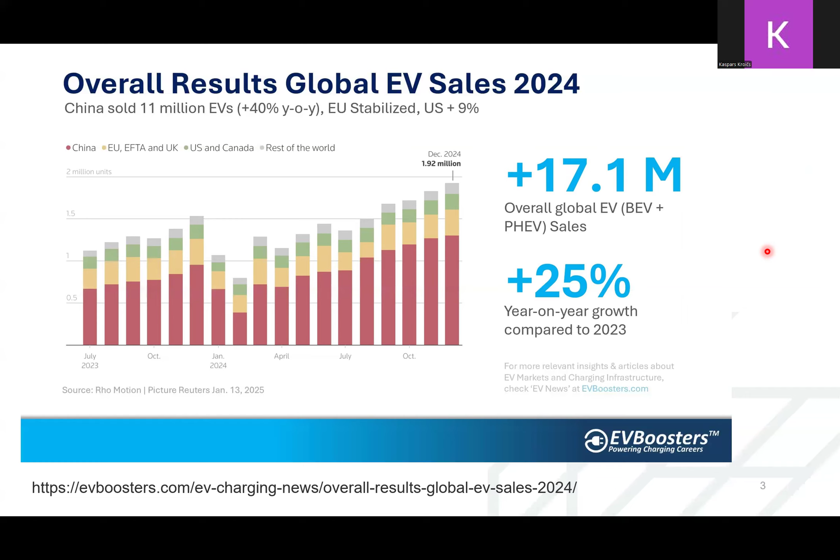And the same is basically possible also for aircraft, to replace conventional engines with electrical ones. So let's see how it is in the case of aircraft.

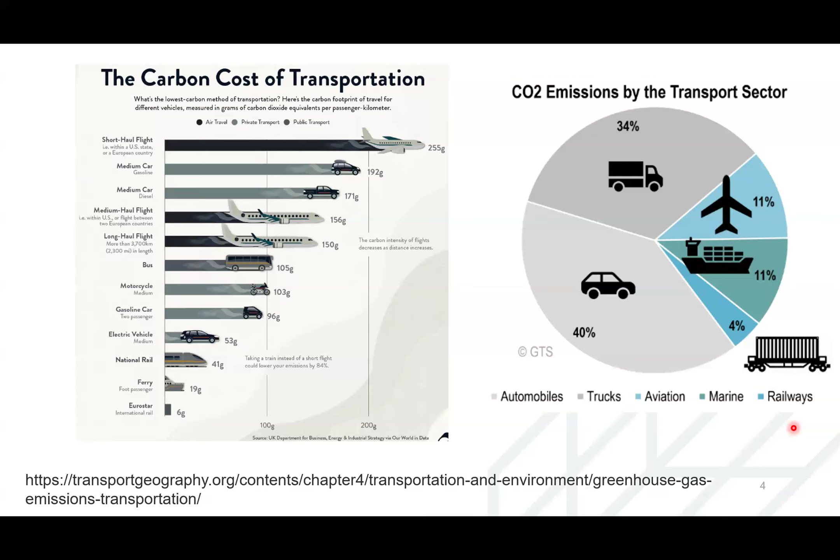Of course, many people own cars, so that is the main contributor. But people want to travel all over the world, and we can see that planes also contribute significant emissions. This is the reason why several organizations are setting targets for the future.

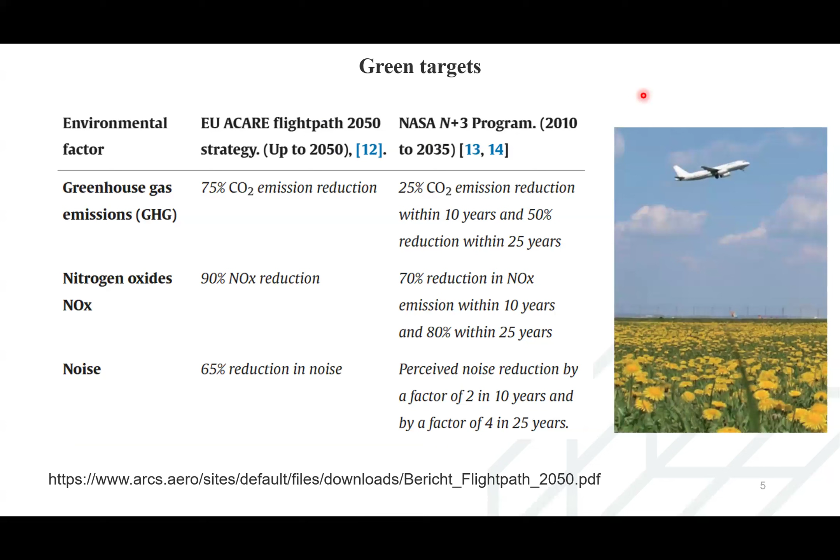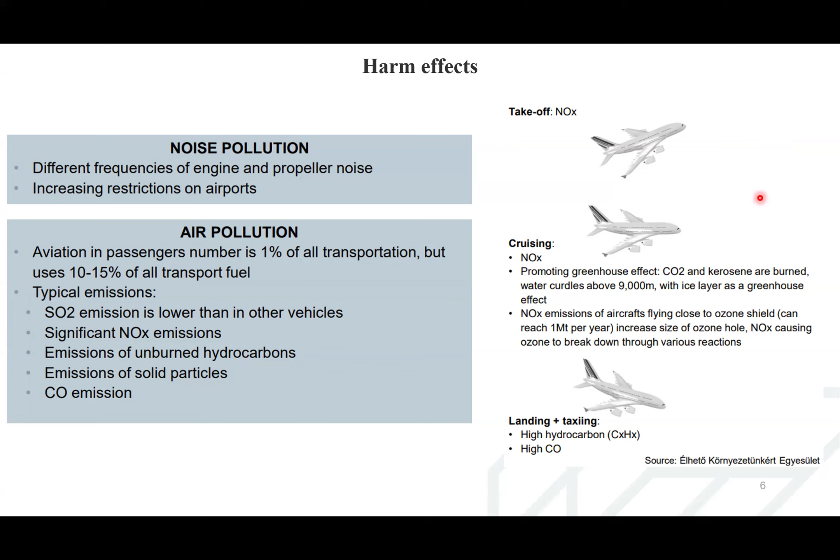How can we reduce this pollution? There could be different approaches. The first one is turbo electric. Basically, we generate electricity and then consume this electricity to power the ventilators, which put the airplane into movement.

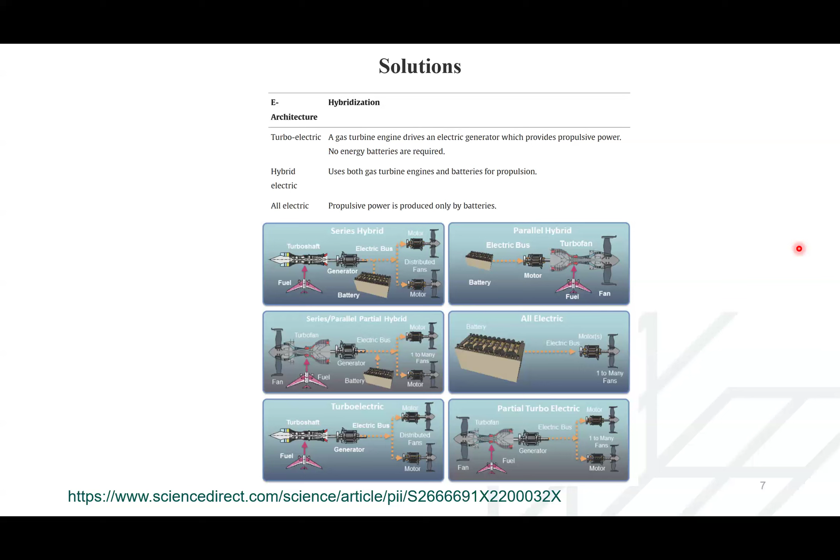Then the next stage is hybrid electric, when we also have batteries that contribute to the drive. This means that when there is need for higher power, the energy from the battery is used, and the gas turbine can operate more or less constantly, thus increasing efficiency. Also, an all-electric aircraft is a possibility that should be considered.

So in the turbo electric case, it seems that it is not very smart - basically we produce electricity and then again put these propellers into action. Actually, we are losing around 10% if we just use the same shape of the plane and the same ventilators.

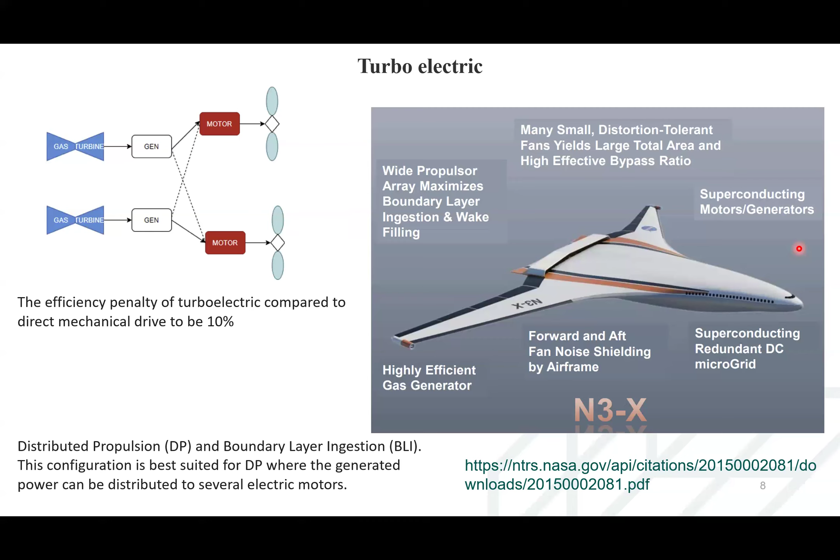So to increase the efficiency, we need to use more advanced propellers. For example, here it's possible to see that this plane has many propellers, and this is the way to increase the efficiency.

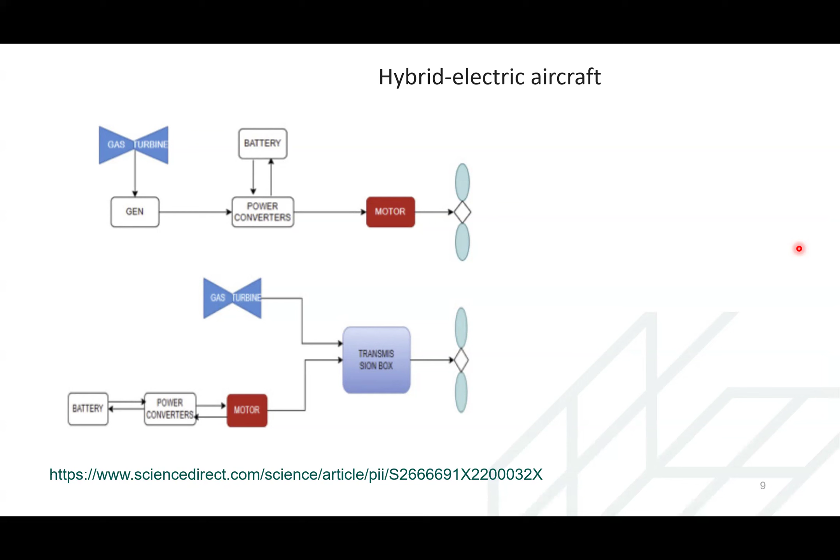The next stage is when we add a battery, which can be charged on the ground, or partly charged from the gas turbine. In this case, we are able to increase power, which is especially useful during takeoff, and of course, in that way we reduce the pollution.

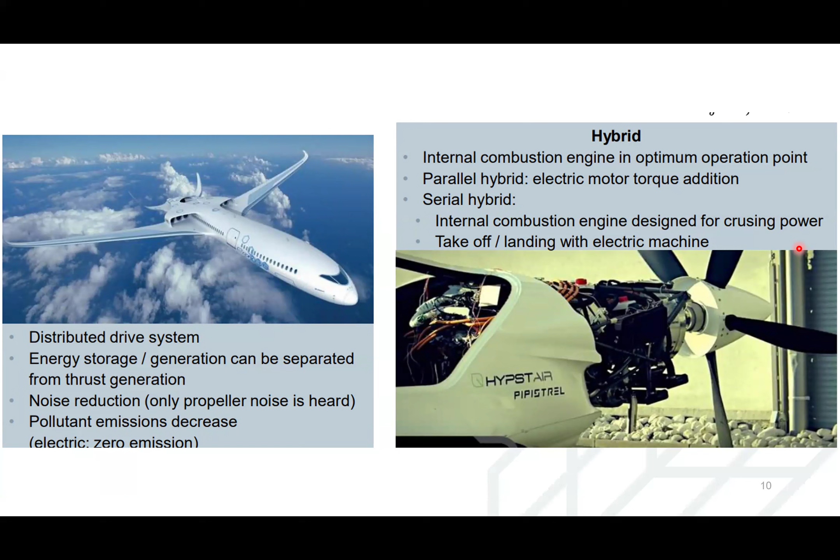Here also, we can use these multi-propeller systems, which again is very useful. For example, it's possible to see such an airplane, which has two generators with gas turbines and 16 motor fans that use power not only from these generators but also from the battery. And there are also some smaller planes.

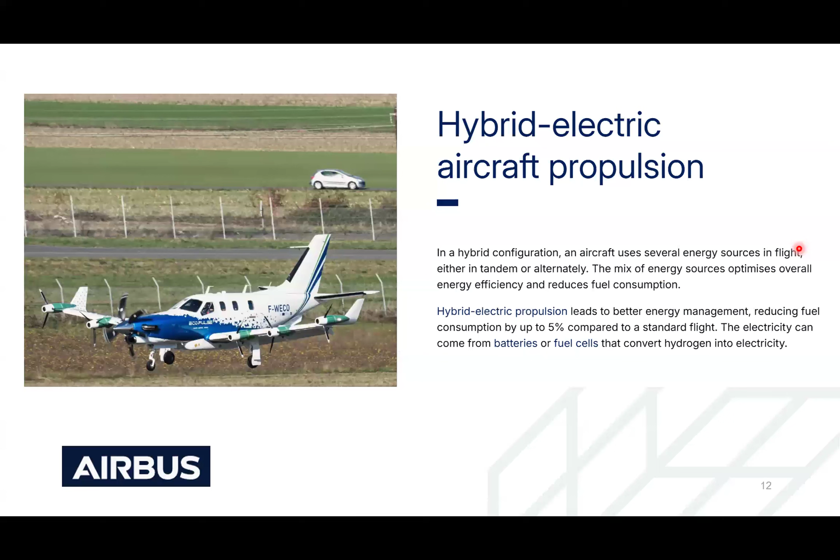Currently, this is in the research stage where these planes are tested and improved. The last option is the all-electric plane, when there is no gas turbine and all electricity is generated from the battery that is charged when the plane is on the ground.

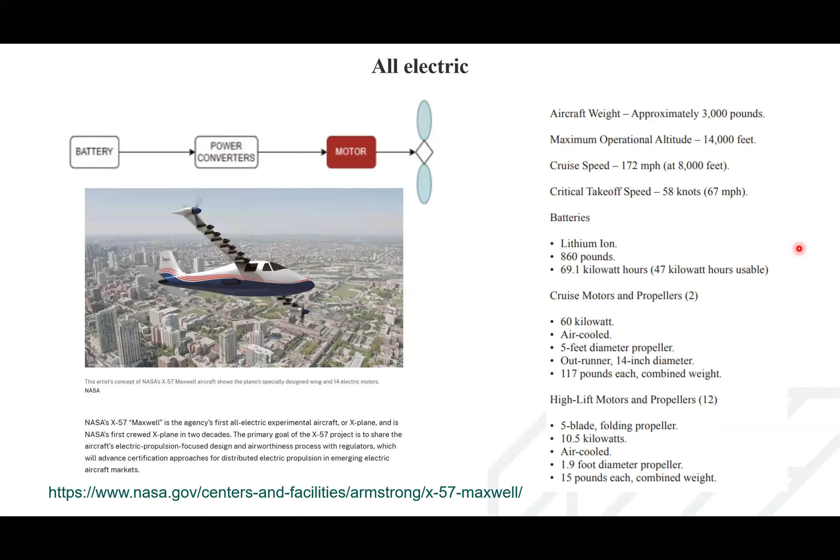There are quite a lot of small airplanes that already provide flights with such a system. As we can see here, this plane is quite similar to a car, so the battery has a similar capacity, and of course we have electrical motors. Here is another example.

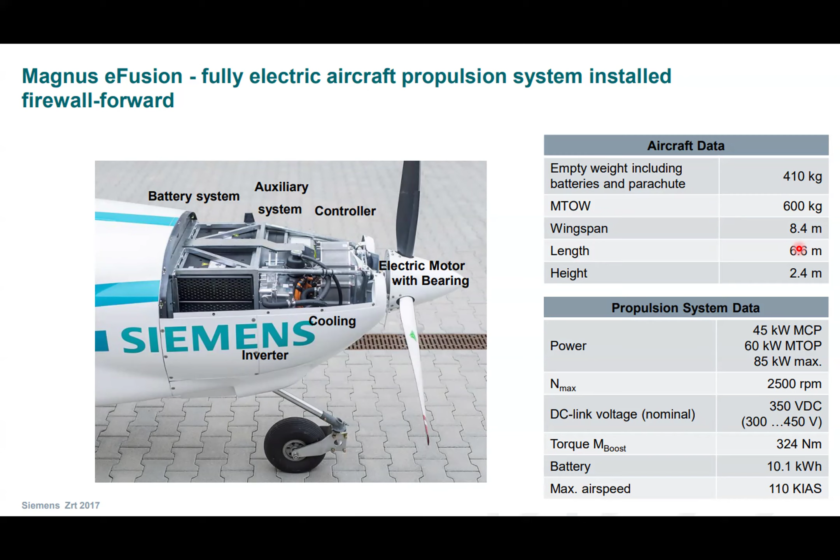Of course, these electrical components should be as small as possible, and also the battery should be as light as possible, because it impacts the system more than for a car - the whole system needs to be very light. The benefit is that it's quite easy to design an airplane that can take off vertically and then fly as a conventional plane.

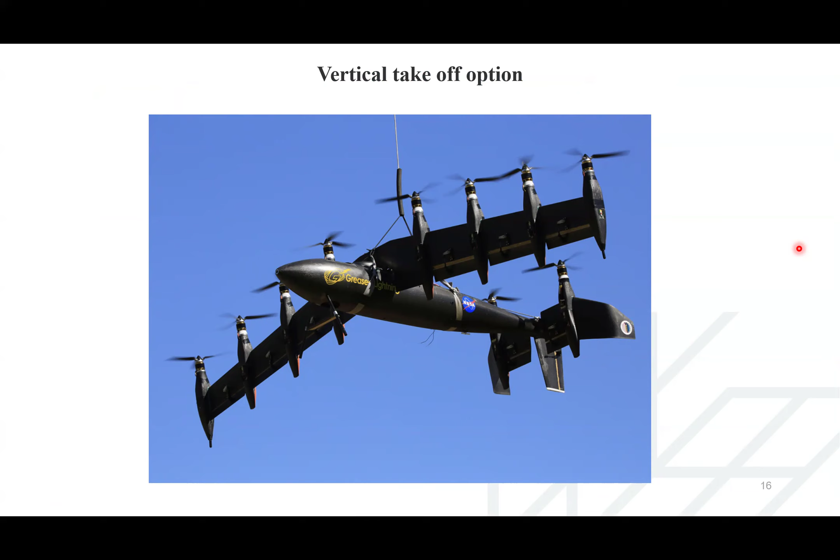This is very useful, but unfortunately, as we can see here, the lithium ion batteries compared to petrol or diesel still have power and energy density that is about 10 times worse. So this is the limiting factor.

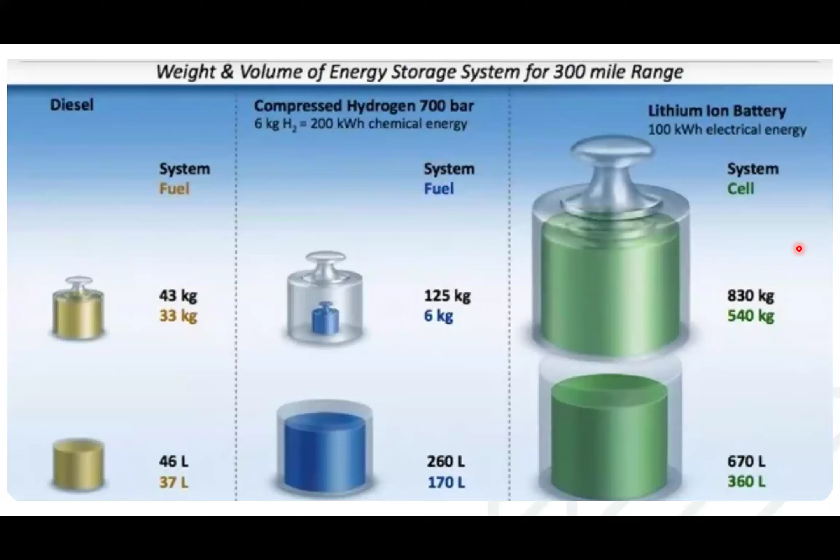The better solution could be hydrogen because it has a higher energy density and makes the whole system lighter. With the current battery technology, it's not possible to build an airplane that can carry many people over long distances. Probably after some time there will be more advanced battery technologies, and then we can build big planes that can go for 1,000 kilometers. But with the current battery technology, it's almost impossible.

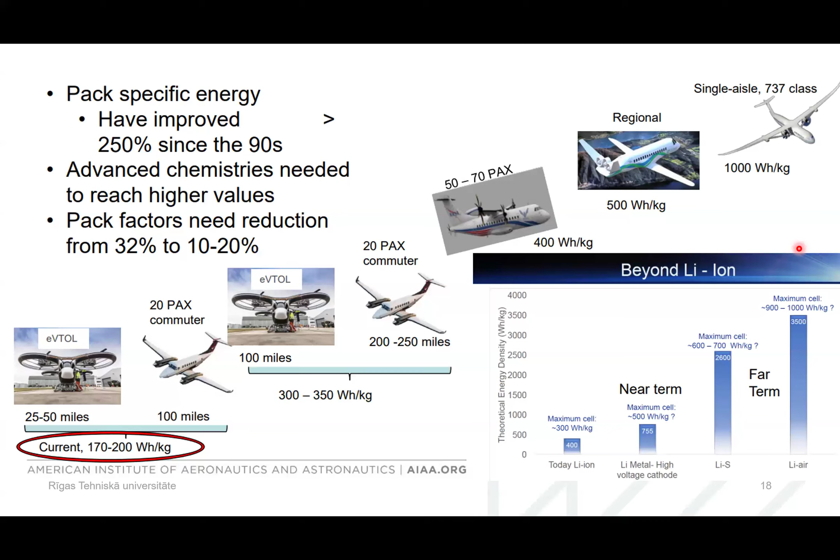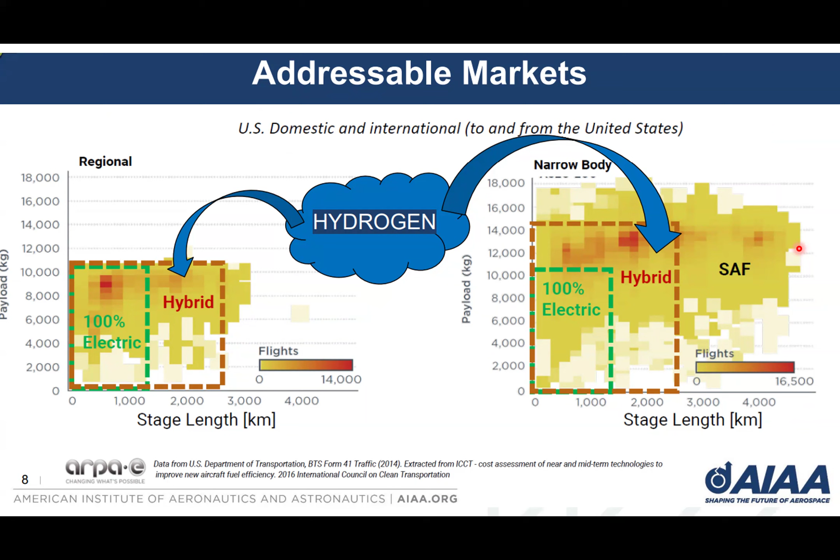This is the reason why in many research projects hydrogen is applied to generate electricity, and then this electricity is used to generate force. So basically we have batteries, and this gas turbine is replaced with hydrogen fuel cells that produce electricity, and in that way it's possible to build larger planes with higher travel distance.

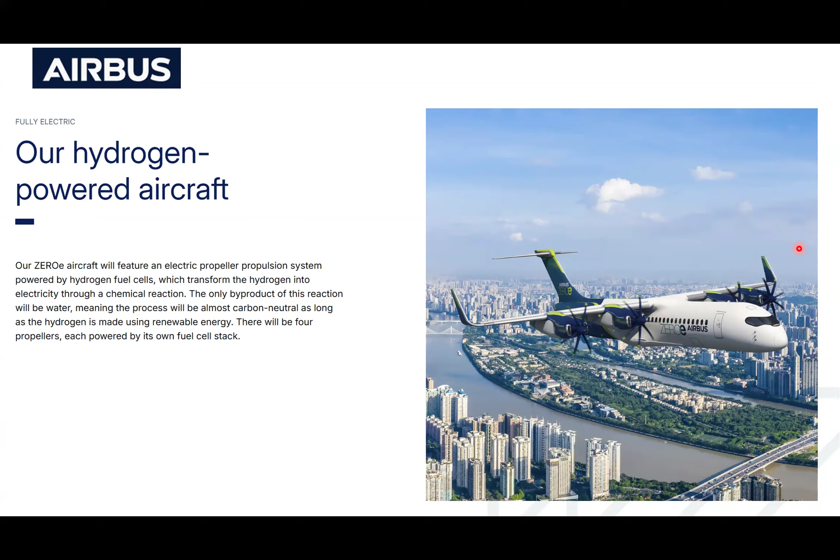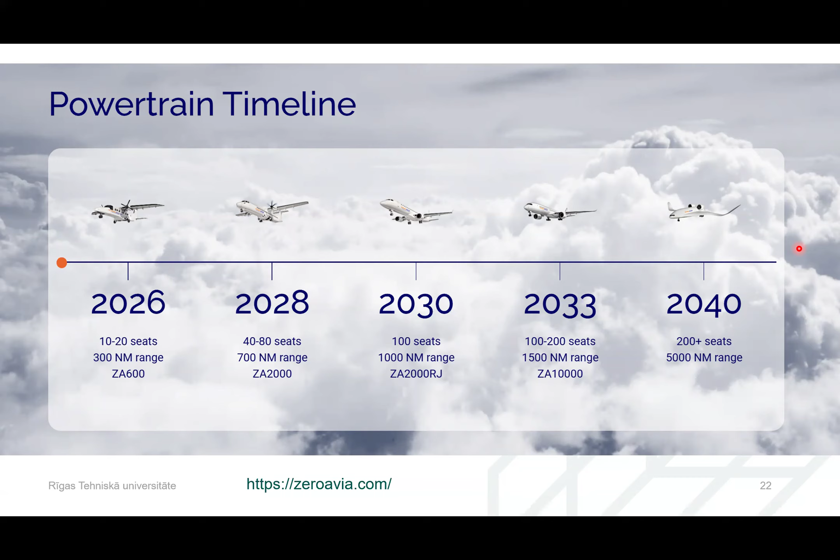This is one example where hydrogen is used with batteries. It's not yet a product, but more for research and experiment data. So there are several companies that do this approach - for example, ZeroAvia, who also have plans to build larger airplanes with hydrogen technologies.

But still, hydrogen has drawbacks. The efficiency of hydrogen production is very low. Of course, if we have many solar panels and wind turbines, then it's possible, but still this is not a very efficient way. The range is not as good as a gas turbine powered aircraft, and this is still quite a more expensive technology, with many other problems regarding regulation and so on.

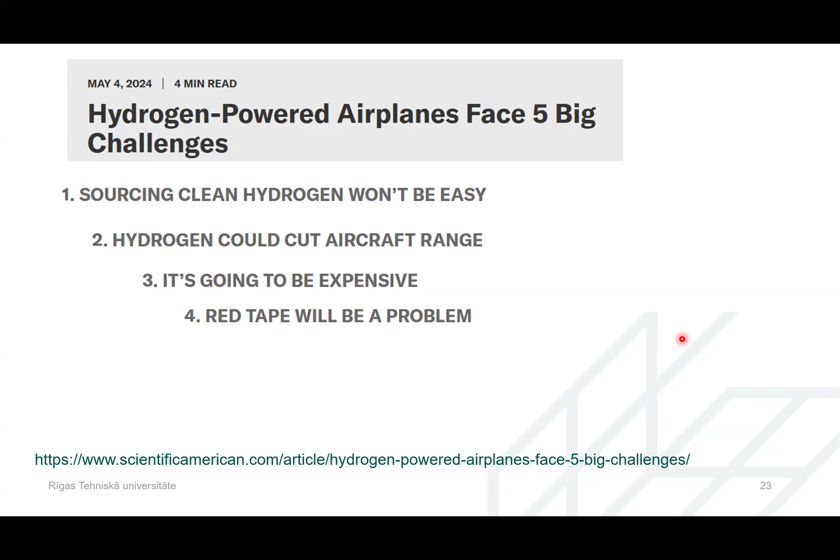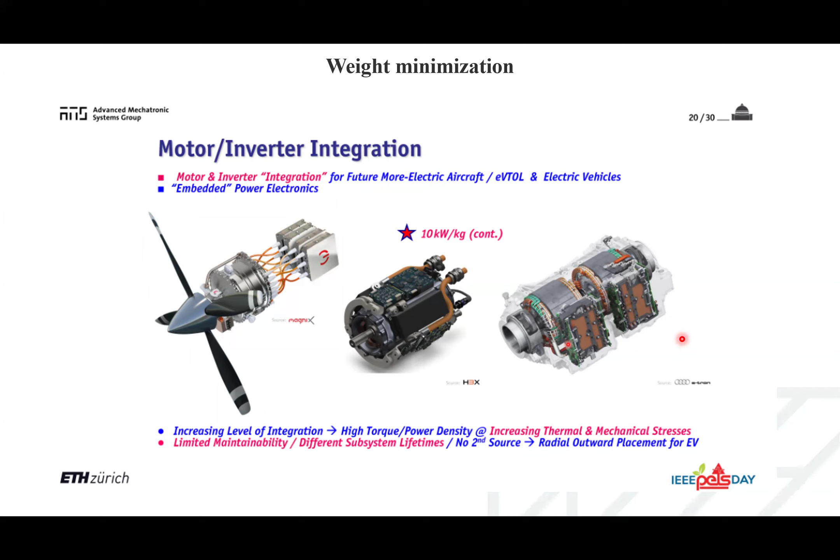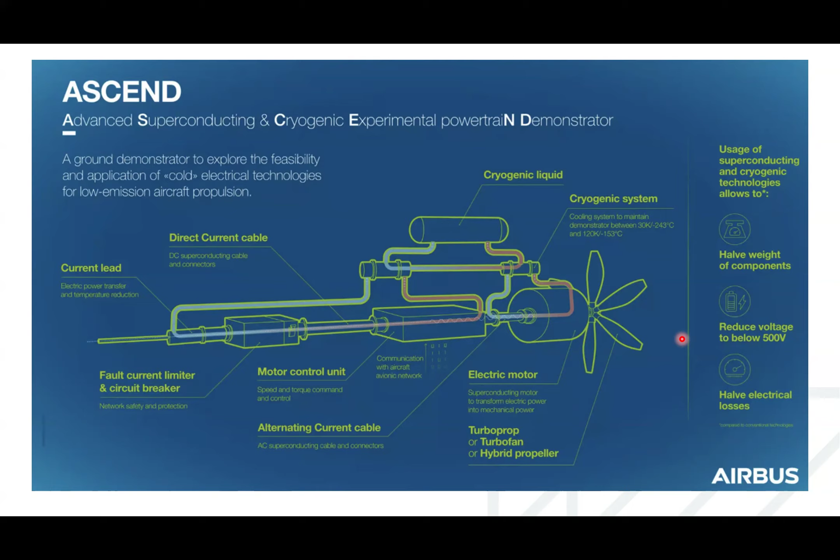If we talk about electrical motors and electronics, batteries - everything should be as small as possible. It's important to integrate everything to shrink the size. There are also ideas about superconducting motors and drives, which really boost the efficiency, so we can get high power in a small size. There exist quite a lot of experimental systems.

It can be concluded that fully electrical aircraft is more suited for small planes today. Hybrid systems with gas turbines are quite promising for middle size airplanes, and more advanced battery technology or hydrogen could be the technology that really pushes aircraft into a more sustainable way, allowing us to go from one place to another very fast while also reducing pollution.

Thank you - this was a brief presentation about these airplane technologies.